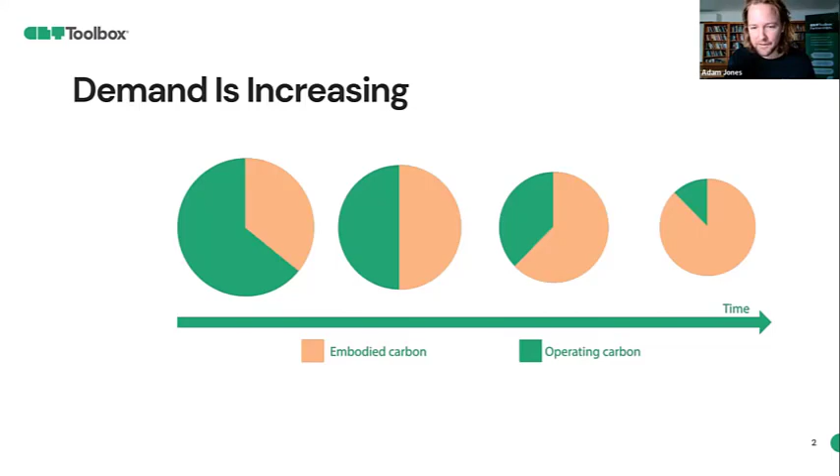So that's sustainability, and then also it's just a different product. Especially when it comes to exposed timber, there are proven benefits as a biophilic design element. There are different patterns about biophilic design according to Terrapin, and one of them is designing with natural elements — we're designed to be in natural materials, not in dog boxes with no inspiring nature around us. There's loads of research to back up the benefits of biophilic design: better productivity, employees taking fewer sick days, improved stress levels, and all these sorts of things.

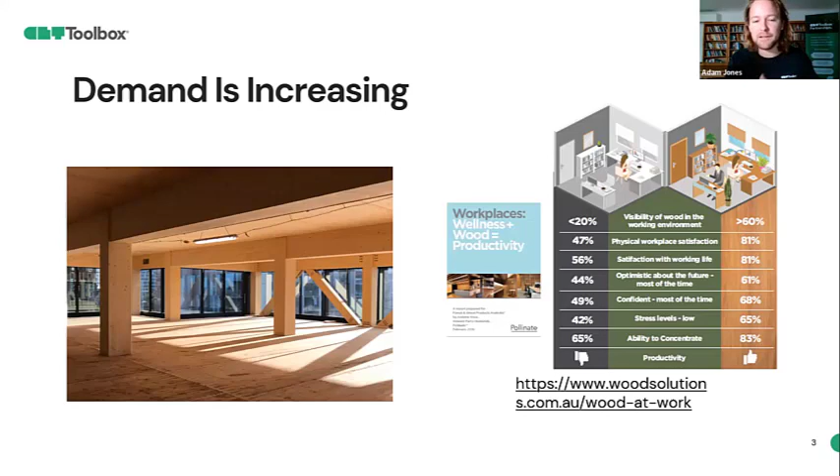So if you're the owner of one of these assets, you actually have a better ROI on the asset itself, and even if it does cost a little bit more, there is a payback period. The numbers vary, but a commonly used figure is about 5% as a reasonable estimate of what that improved rental yield might be.

But it doesn't matter how big the drivers are in terms of demand, there are bottlenecks to the adoption here, and that's one of the things we're trying to target in our medium to long-term roadmap, just to look at the bottlenecks more broadly.

So at the very beginning, you've got the client and architect, they're wanting a lot more timber for obvious reasons. In design meetings, I don't think there's too many saying no at that stage, because we're dealing with a better product, and from a triple bottom line point of view, something that can be better as well if designed properly.

But then if you have the architect who wants the building, they've got to find their project structural engineer. Around the country right now, part of the research we did, we've got say 10,000 to 11,000 structural engineers across Australia and New Zealand. Out of that, we've got about 1 in 300 who are true mass timber specialists.

Or timber specialists in the mid-rise context. That means if the architect just shoots for their usual engineer, it's almost certain that it's not going to be someone who could take the design forward. From my personal experience, if it's not one of the timber specialists, a lot of the time they might not put their hand up and say 'I don't want to do it because I don't know how.' A lot of the time there'll be other reasons put out instead of just not being able to do it, because no one wants to say that to a client.

But then you've got quantity surveyors as well. So say if it does get designed structurally and it goes to the quantity surveyor, if you've got a traditional quantity surveyor who may not want to put the time and effort into raising the benefits of timber - things like speed of construction is one. So if you build faster and you've got things that have a dollar per week cost, you reduce the weeks and you get a direct cost saving, that's significant.

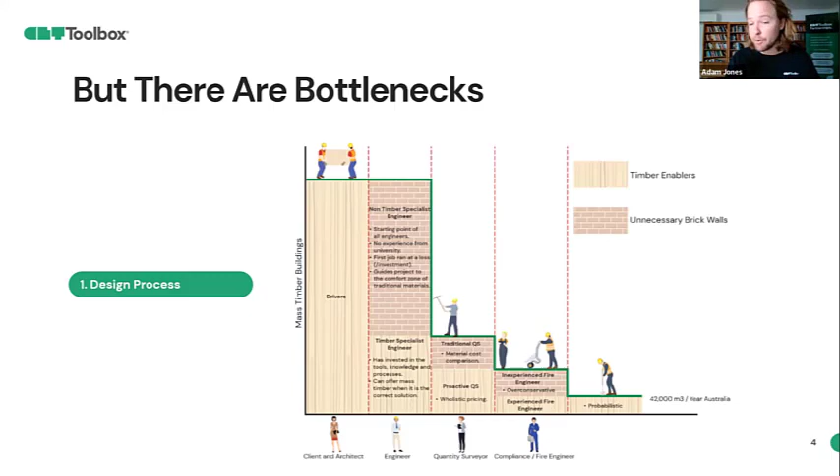We're less than a drop in the ocean compared to what concrete is. So one of our values as a company is to grow the pie as much as possible. We don't have to worry about cutting the pie at all, because we're cutting the pie on something that's just a tiny fraction of the overall market. If we solve collective problems, we can grow the pie significantly and improve things for everyone, and have a net positive contribution to sustainability.

So for us as a company, that's the overall arching bottlenecks. What we're trying to solve is one specific part of this bottleneck diagram I showed you before, and we're focusing mainly on the structural engineers, with secondary benefits on other things like compliance, which we can talk about later. But there are 2 major problems. Number one, it isn't taught at university, pretty much at all.

I think you get a 4-week timber course where you do a bit of class 1 low-rise construction, but nothing in that mid-rise context. So that means the structural engineer on the job has to try and figure it out themselves, and there's no Australian standards. So where do I start? What's the authority? These are really hard questions to answer.

You've got guides from FP Innovations in North America, which are absolutely phenomenal. proHolz has got guides, which are phenomenal. You've got Euro codes, local standards, New Zealand standards, WoodSolutions, and 50 guides. For someone starting their journey, it's a very hard task.

And then to know what the authority is and when to bring the right design method in for the right context as well. We've got different species in Australia, so where is it applicable? If you're using Euro codes, can you use that for the local context when it comes to design methods?

These are things every single engineer has to ponder at the start of their journey, and I'll talk about replication costs later. The second problem is the reinvention of the wheel, doing the same task. When there's no software solution, every engineer builds spreadsheets to fill the gaps, and everyone's building the exact same spreadsheets, whether it be WSP, ARUP, Aurecon, TTW. So there's reinvention of the wheel, which drives up overall costs.

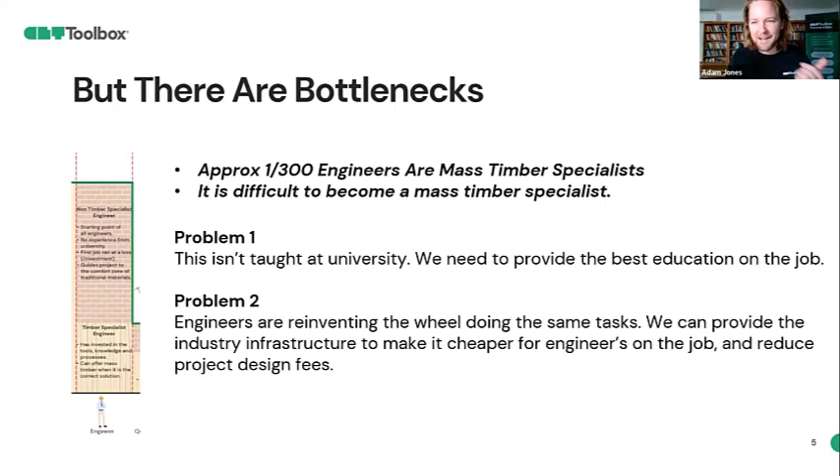It's not just for engineers, it's also for the supply chain. If you've got a design guide with span tables underpinned by a certain vibration method, for example, and you upgrade the vibration method, you've got to reproduce all your material for your design guides, and then somehow get that manually over to the engineers as well.

So as part of our research, we interviewed mass timber specialists around the country. We asked them how long it takes to build out a CLT floor design in the ambient case using Excel spreadsheets, and how long it took to learn reading all the design guides like I mentioned before. We did that for every single element in the timber design ecosystem, and for 3 types of buildings.

So you've got a post and beam building with CLT floors, GLT beams and columns, and we grouped up all the things you need to design there. We did the same thing for a hotel building with CLT walls and CLT floors, and then for a light frame building with light frame walls and CLT floors.

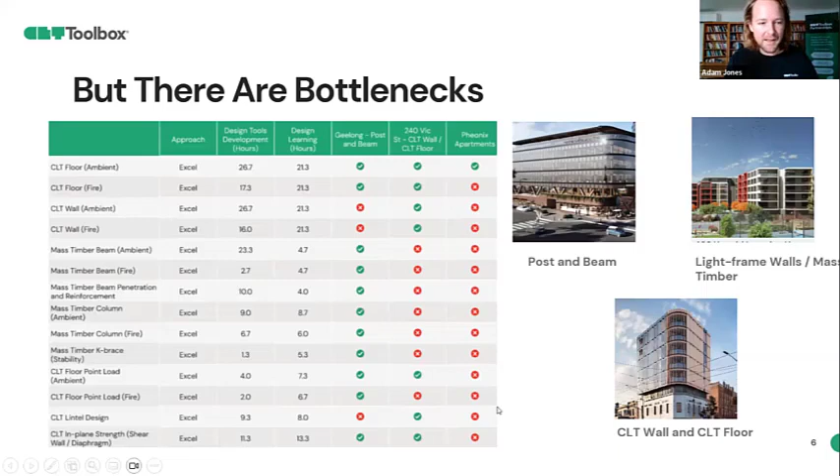That's not the full set of computations you can see there, but what it came down to is about 500 unpaid learning hours. So if you're doing this for the first time, without the education, with the need to build spreadsheets, starting your journey to get to the point where you can design this, it'll take you about 500 hours that isn't required for a concrete and steel building where there's existing infrastructure.

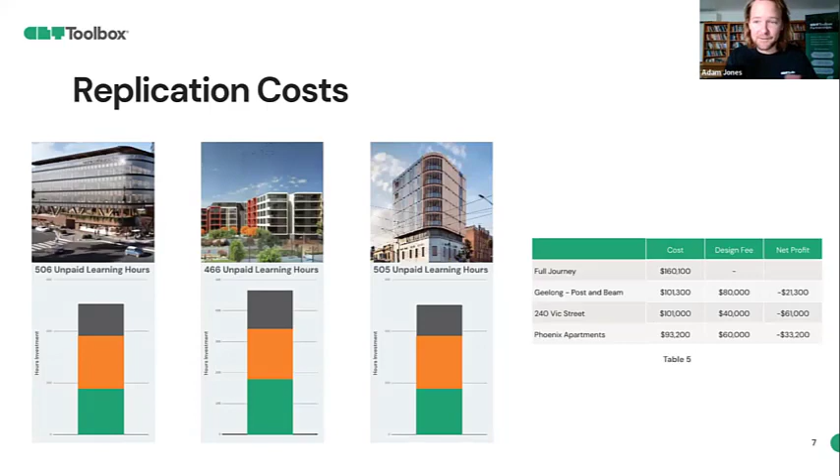So that means if you're putting a design fee in for one of these projects, if you're trying to be competitive with those who've already made this step, you essentially have to run it at a loss, because you're spending more money and time upfront figuring it out than the actual design fee allows for. That's essentially the bottleneck for engineers. As I said, there are 10,000 structural engineers around the country, and not many timber specialists. We're trying to give the tools to those 10,000 structural engineers, and I'll talk about that later.

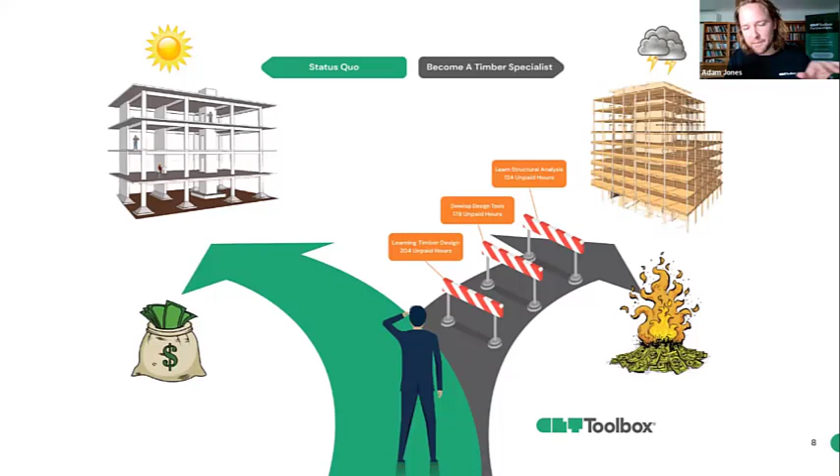So next I want to talk about this idea of replication costs. Every engineer around the country has to solve these hurdles themselves, and every time an engineer solves these hurdles, it increases the relative cost of the timber design compared to a concrete design. And that's replicated all the time.

There's ways we can reduce this replication cost using inspiration from other areas. Think about writing books - you've got J.K. Rowling. When she did Harry Potter, she wrote the book once and solved that problem once, then used distribution channels to print it a billion times. She didn't have to print it for every individual reader.

When it comes to ballet, which my partner's in, it's a similar thing - you do the choreography once, you teach it, and then you dance it as many times as possible. And also in the automotive industry, it's something where you design it once and use it many times.

This concept is a bit foreign in construction. We don't solve the problem once and use the concept of leverage. A lot of the time, everyone's going to solve the problem individually - every engineer at every company. So this is where we draw inspiration, because the ultimate solution to solve problems once and use leverage is software.

Right now, let's say someone's starting their journey - they're a 1 out of 10, of course they're going to be, they're just starting. They need to go through that river and the hurdles and get the scars and pain on their journey to become a timber specialist.

But through software and this idea of infrastructure, we can get the very best people around the region - 8 out of 10, 9 out of 10, 10 out of 10 in what they do - to solve the problem once. They might be the PhDs in the specific topic, the best authority. Leverage their brain, turn it into infrastructure, and that means the person just starting out isn't starting at level one - they're using leverage to get the very best the whole industry has to offer.

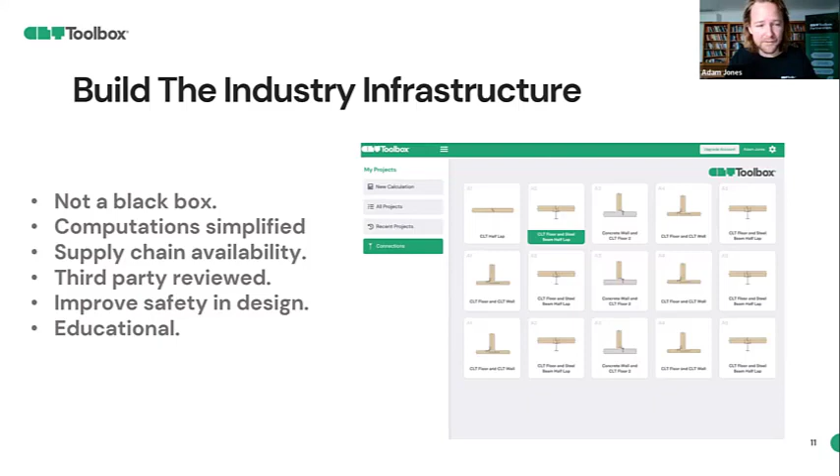And most importantly, is educational - because some things are quite complicated.

As a primer, something like floor fire design, there's a bit of a grey zone between what the structural engineer does and what the fire engineer does. Some suppliers have fire design guides now, and there's a DTS solution - deemed to satisfy - for structural adequacy, integrity, and insulation. But it's only for simply supported and two-span equal cases. It's not going to cover the range of cases.

So there are times where you might need to step into performance-based design. Then you've got effective stiffnesses - there's different methods around the world. It's a shear analogy I used to use, and it took me a while to realize you can't use it for non-symmetrical sections, which is the case for fire design or designs where you've got different grades throughout the layup.

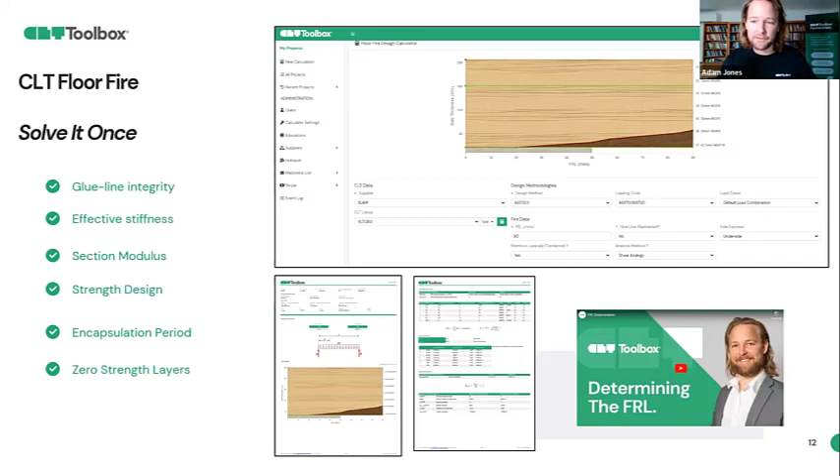Strength design, encapsulation, and zero strength layers - again, something treated differently around the world, whether you're in AS 1720 most recently, but also in the upcoming Eurocode 5, it's treated differently too.

Or CLT floor ambient design - a lot of design guides out there by suppliers have totally robust design methods underpinning the span tables, but a lot of them will use a different vibration method to create the span table. That means if you're using it for a prelim design and then put that in for pricing, it might not be an apples-with-apples comparison if they're using a different vibration method.

And also DFMA education - if we are going to drive down the cost of mass timber more generally, we need to actually understand the implications. If you change your grid spacing by half a metre or something, little do you know as a designer, you might be the difference between a full truck and no wastage in terms of transport, and maximizing crane liftage and speed versus reducing that by 50%. Little tweaks like that make a big deal, and getting that data from DFMA through to the hands of designers matters.

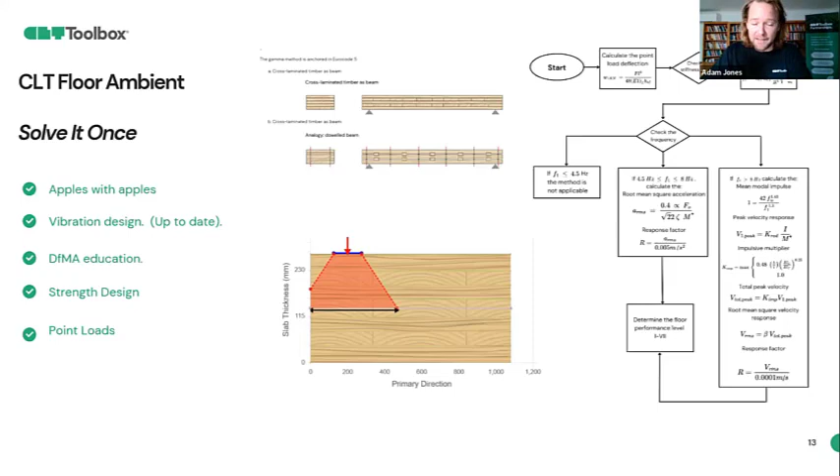And then point loads as well - that's actually quite a complicated thing to do, and to ask engineers to solve all that is a big ask.

So part of our plays, we're doing partnerships, firstly with the supply chain. We're in contract phase with a lot of the mass timber supply chain right now, and that means getting the one-stop shop, because if we're trying to grow the pie and make it as easy for engineers, we are in that grow-the-pie attitude - going from 0.x% market share and growing it by a significant proportion - then everyone wins.

Also associations and universities - especially when it comes to unis, they are the most progressive people on the planet, caring about sustainability in that cohort and demographic, but all they're really offered is concrete and steel. I'm aware students really want to be proactive, and if they knew what their career impact was with their decisions, and learned how to design with timber, comparing it to their individual decisions, it's chalk and cheese - because by far the highest leverage you've got is in your career, and at least knowing how to design timber when the right time is.

So yeah, we're looking to partner with universities as well. It's not our immediate priority, but we're going to try and target fourth-year electives, because those are points where we don't have to rely on curriculum changing, and engineers can proactively choose what they want for their final year project.

And then also investors - we've closed part one of a seed round, and we've got a really good group of investors on board, including a co-founder of Aconex, Rob Phillpot, who's from Gravel Road, also some other executives with investment banking backgrounds. Interestingly, BlueScope X have joined our journey as well - they've got their legacy business, but also their decarbonisation arm. And then Archangel is our lead investor, and we're about to finalise another round this week. So that's where we are right now.

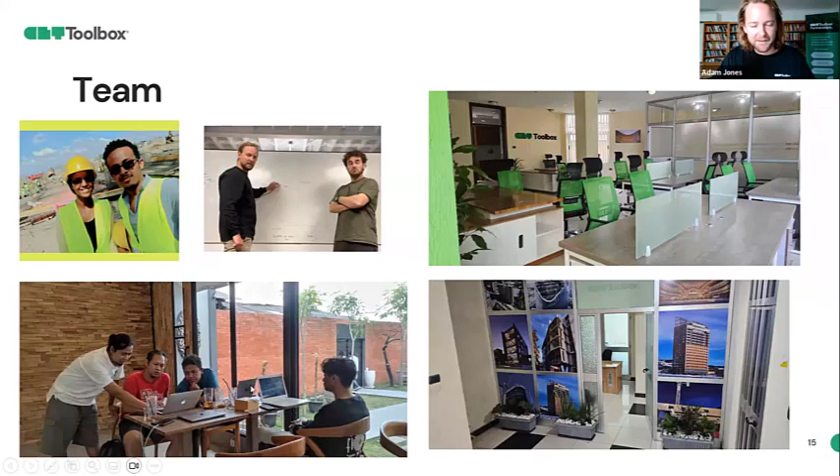And then also we've got a software team in Semarang, Indonesia, on the bottom left here - totally different culture from a software point of view as well. So we're just starting our journey, and we're about to release our first release. We've got a bunch of users on the software right now, and we're looking to have light frame connections and hybrid as well. The idea is we solve the problem once and then use it as leverage to make it as easy as possible to drive change in timber construction.

So with that introduction, I might get into the software now. It's 11:26, so I've got one eye on the time. All right, so it is a web-based software.

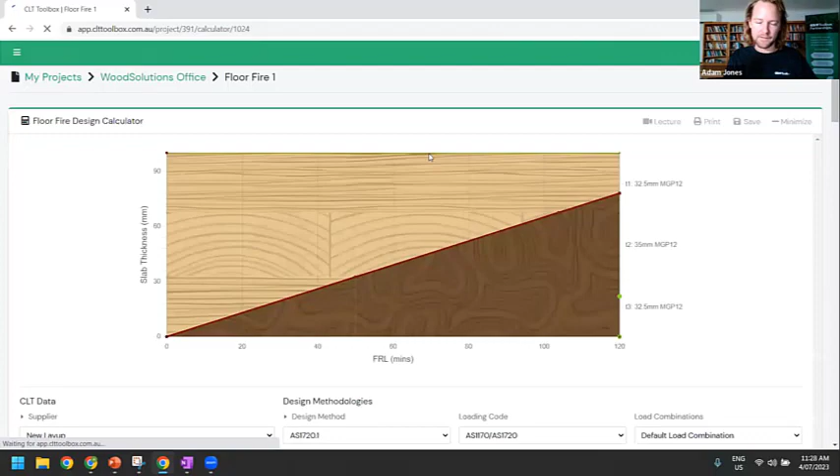All right, so I'll speak about it as if I'm an engineer. Let's create a new project - or you can calculate a project under an existing project. So let's go WoodSolutions Office, Floor, Fire 1. And I'll start on fire design just because I showed it before, and it's one of those things that's a tricky problem out there. It takes a long time to actually learn this.

So I mentioned before, our most important value as software providers is not to be a black box. So we use visual images all the time here to visually show what the software is trying to do. It serves a lot of purposes, but we have a serious review process, so there are no software errors. But if there ever was one, since it's not a black box, it'll stand out like anything - it'll quickly be weeded out of the platform in a 2-week release cycle.

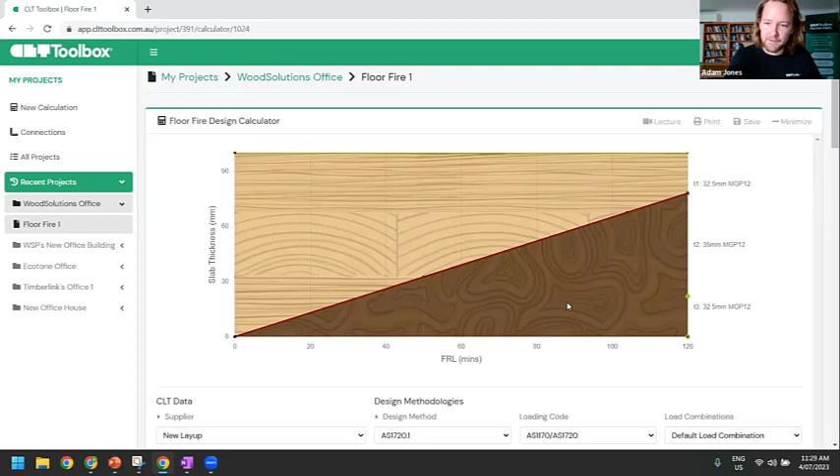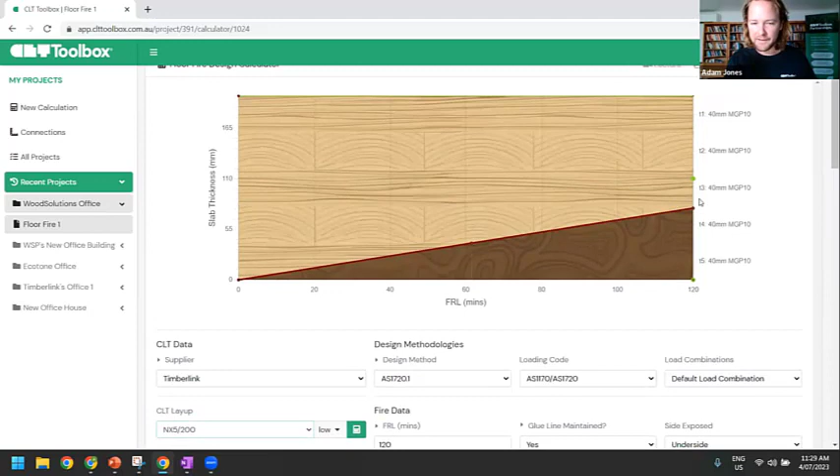So you've got here the FRL on the x-axis, you've got the grades on the y, and the slab thickness. You've got the ability to do new layups, individual layups where you can just set your grades and build it from scratch - probably don't recommend that, probably recommend actually using what's available by the supply chain. So you can see here you've got the different options from suppliers with all their supply chains ready to go. So you can see here I just chose a Timberlink panel - you've got MGP 10s on the outers.

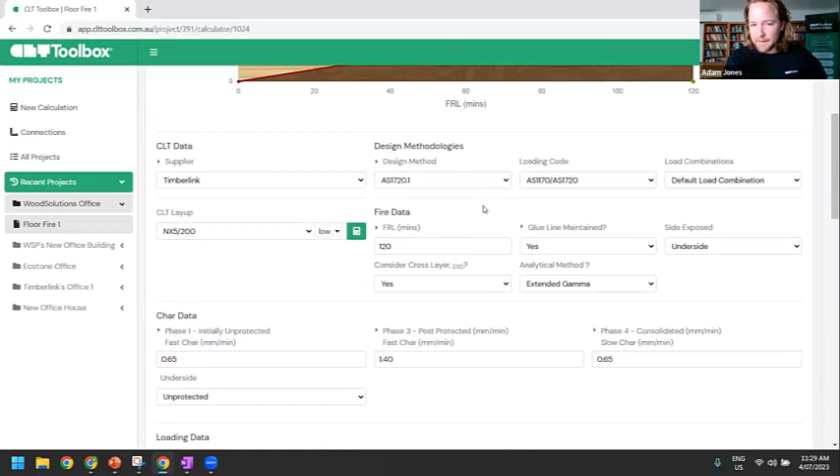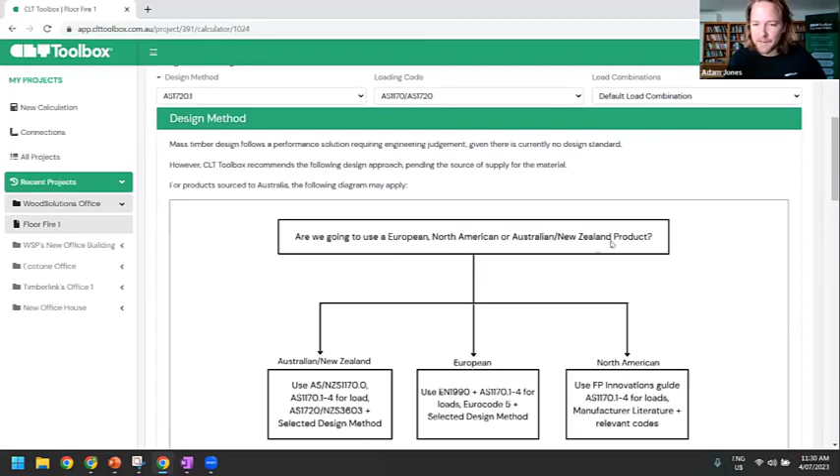Going through here, you've got different design methods. We've built in the local loading standard, local design standard AS1720, and Eurocode 5. So it's the ability to swap between suppliers and design methods as well, to make things as easy as possible, and also with the loading code as well. Not being a black box, whenever you're uncertain about something, that's where we have a drop down, and this is where we provide the education. So you can go, 'hey, what design method do I use?' We have a bit of information here, a bit of a question flow diagram based on where you're actually designing and getting the material from.

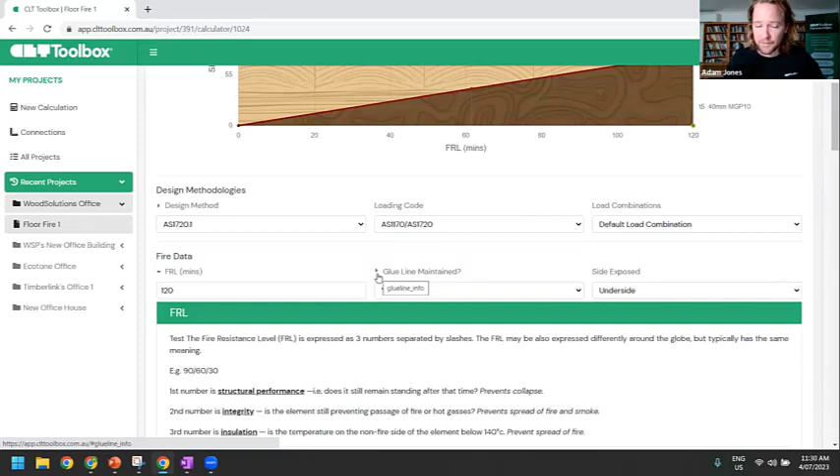Moving through, when it comes to FRL, you've got the data, and with some building surveyors on the call right now, this has got a big opportunity to actually educate structural engineers on the compliance pathway. We're always open to speaking to building surveyors as well and getting the right context in the drop-downs and agreeing upon things. But for any case, we've got information on integrity, performance, insulation, and a bit of information about fire tests.

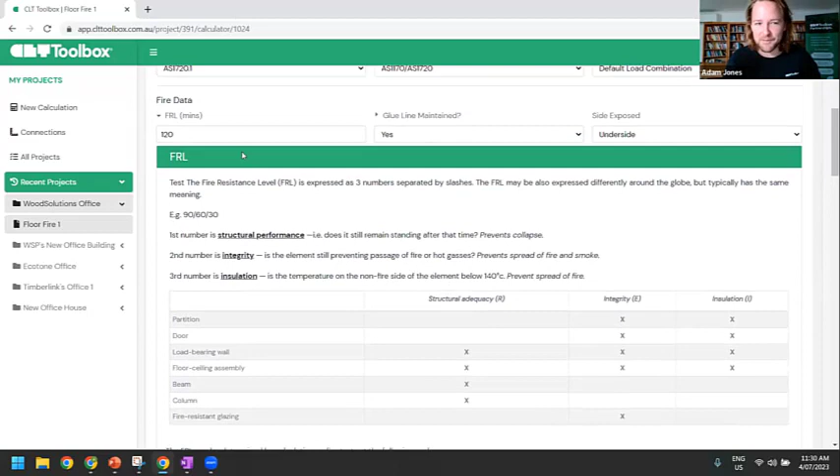And this is a second release, so I think on the FRL and compliance side we can really build this out, and most importantly have videos and education. In this video, it's just a conversation I had probably ten times on different projects about what the compliance pathway is, do I need fire tests, why would I, why don't I, all these sorts of things.

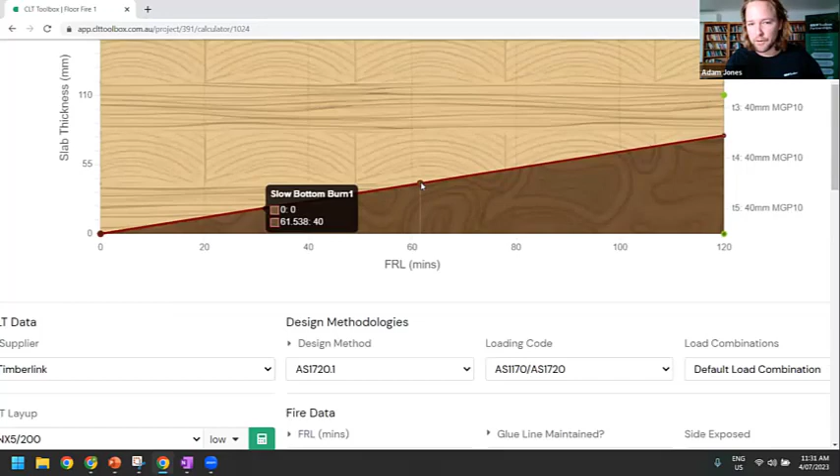We've got the ability for glue line maintenance, so if the glue line, for example, was to delaminate or the glue was to fail before the fire line reached the glue line, then you've got a different scenario there, and we've got that built in. You can see the faster char model built in around the glue line for the first 25 millimeters before it gets insulated and reduces as well.

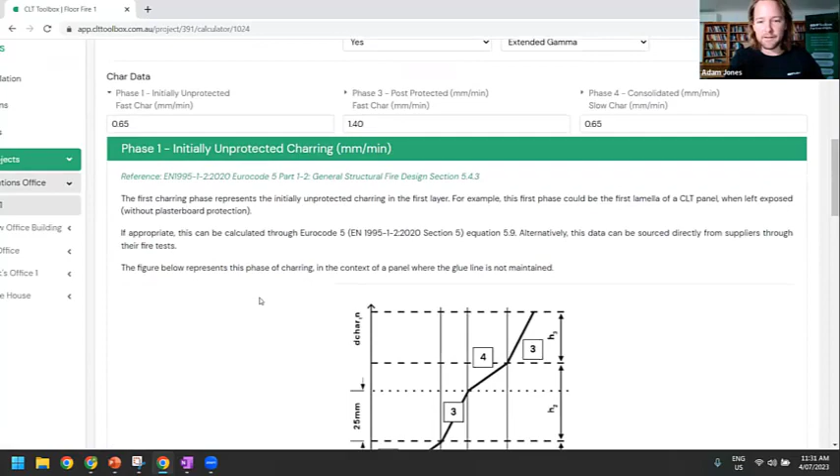Then following that, you've got your different char rates. This can usually be done directly from the supply chain, and if the supply chain wanted to, we can hard code it in for the individual suppliers as well.

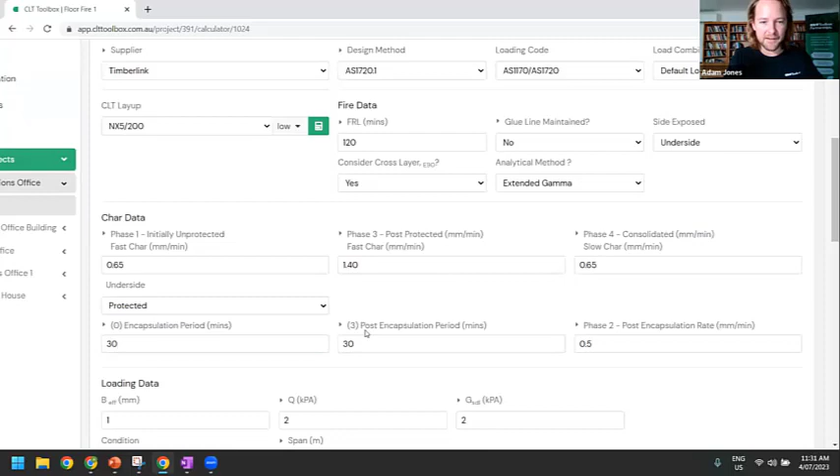You've got the ability for plasterboard protection, so I just added protection in. You can see here the plasterboard adds in, say, for the first whatever the encapsulation period minutes is, and that's the period where you've got no charring. Then after that, you've got the temperature reaching above 300 degrees here, so there is charring, plasterboard falls off, and you've got the faster char rate up to 25 millimeters, and then that's the end of the first lamella.

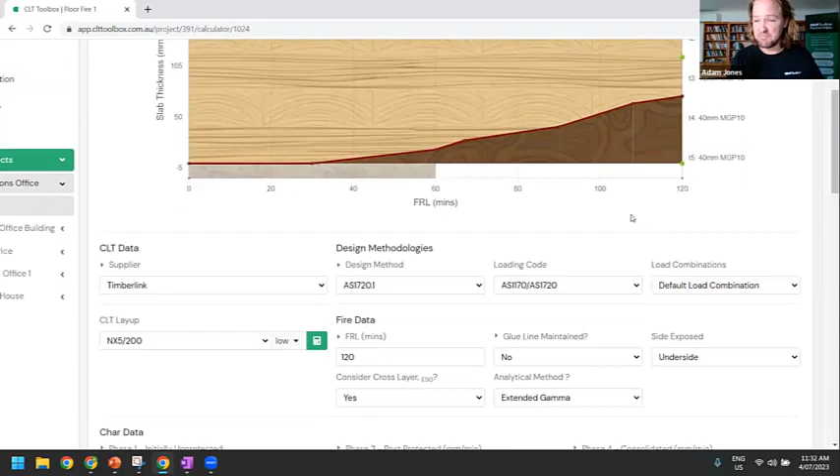So, what is the char rate of CLT? You can see right here, there's not one answer. It varies a lot based on basically the building physics or the physics of the fire itself, and it also varies upon the input of your glue line.

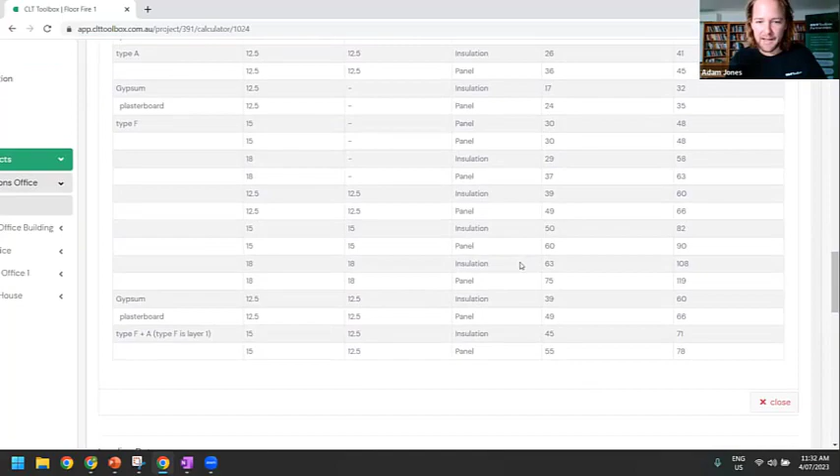Moving through, if you're not sure what that means, we have the information on the char rates, what it is, and right here we've got information from the Fire Safe Use of Wood in Buildings, the Global Fire Design Guide, with some of the data commonly used in start of charring and failure time. But again, being a performance-based software, which I can talk about more later if we want, that means it's on the engineer to do it, so you can use the data directly from suppliers, which is most robust in that sense.

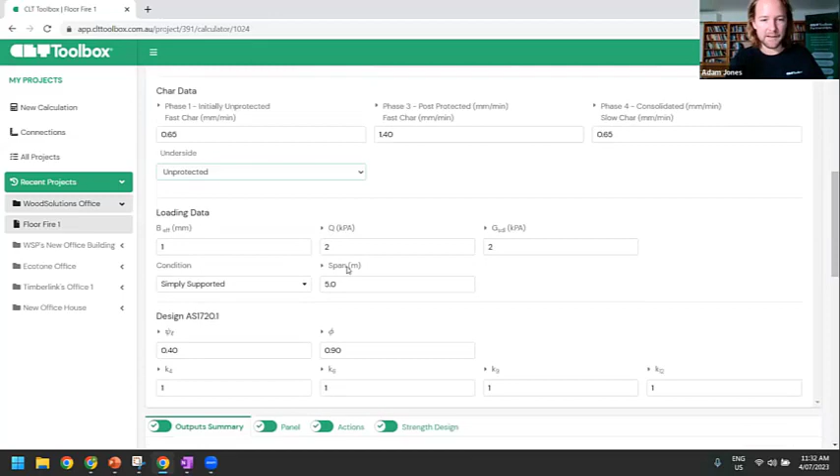All right, moving through, it's got encapsulated, we're building out all the analytical methods. One of the limitations of spreadsheets is you can't really build out robust and quite complex analytical methods. When it comes to span tables, you don't have two-span unequal either, so even if we do have some guides, it's not available for the two-span.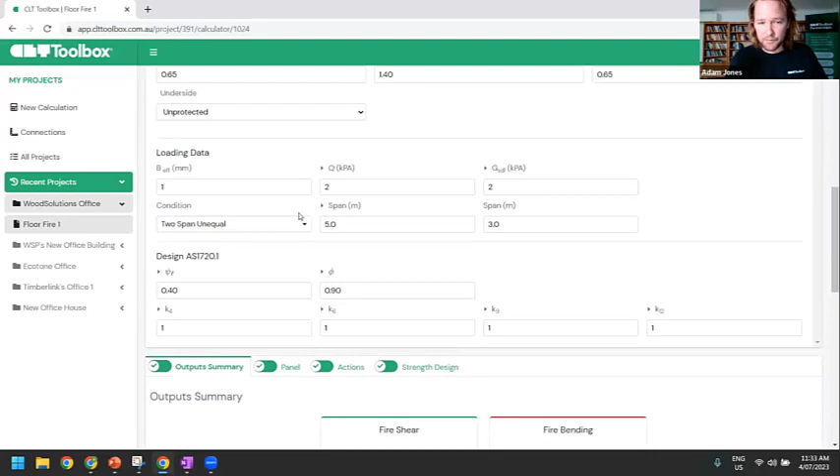So moving through there, again, DFMA education. We've got a bit of information on transport limitations here, helping the education from a DFMA point of view, what's the impact of spans, and then moving through. You can see here your design where we're failing here, so I'll just choose a bigger panel, and later we can upgrade that, and it's all dynamic based on what the inputs are as well.

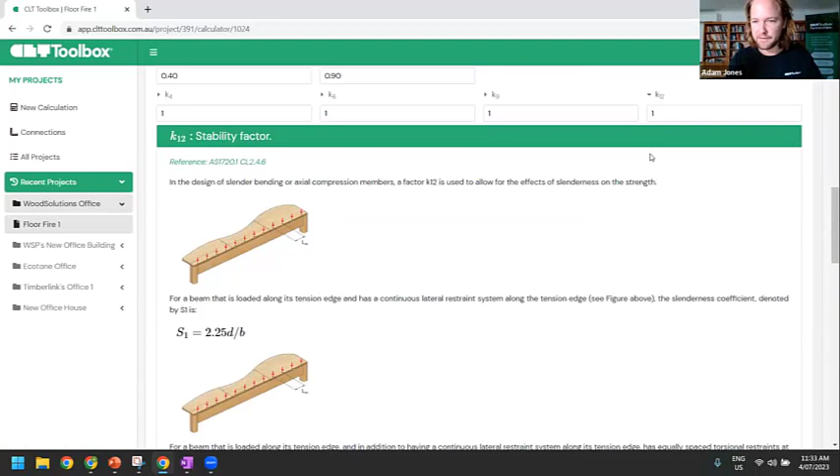All right, so then we've got the design data from AS1720. We've recreated the imagery and things like that for the mass timber context as well, so you can educate yourself and have it at your fingertips. Right now you can see there's the NCC, there's a proHolz guide, there's Eurocode 5, a lot of different guides that engineers would have to download and source, and we're trying to get the education in one place to make things easy.

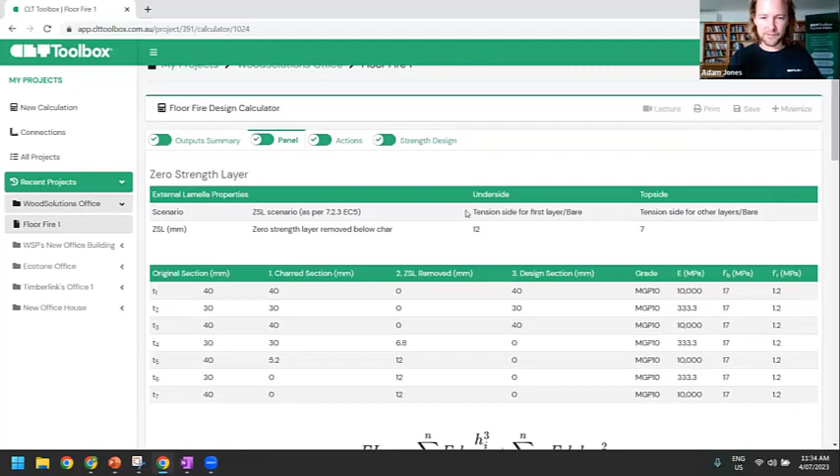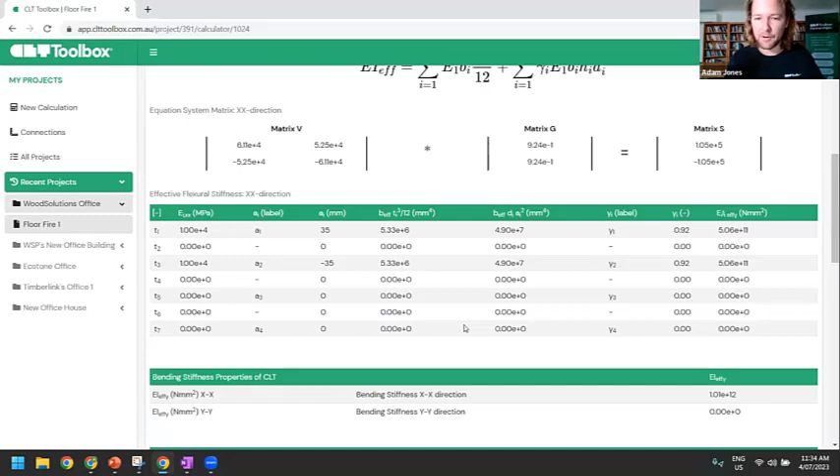So as a user, you can start going through the computations. You might minimize the input page and start going through the calcs. It's all dynamic, so right here we're using an effective stiffness method using the extended gamma method. To solve this, we had to solve 11 by 11 matrices, which again is really hard through Excel, or can't really be done in Excel like you might want to, and through JavaScript you can solve unique problems that can't be solved otherwise.

So that's a complex thing. We had to do the extended gamma method because things like the shear analogy method we've got here as an option can't be used for non-symmetrical sections as well, so there are times when the extended gamma method is the most powerful.

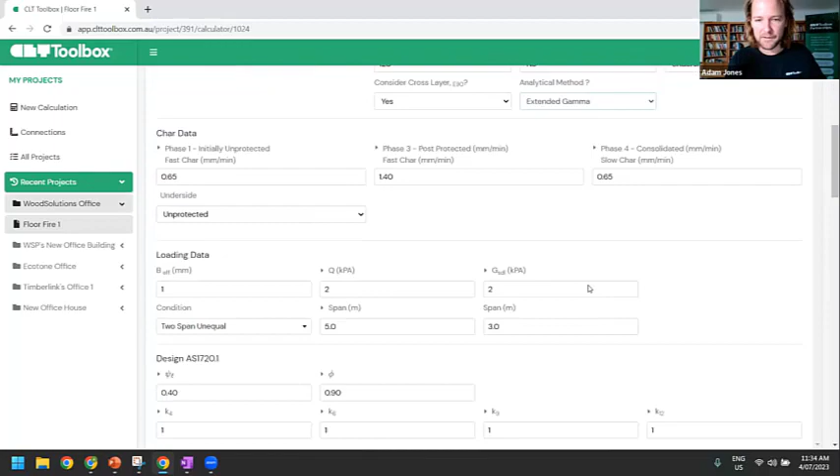Moving through, we've got the shear force and bending moment diagrams, strength design - not being a black box. We've got all the references for all the sources, as you can see here. Then as a user, make sure the design's good, and then you can print.

Right now, being early on our journey again, we've got the lecture infrastructure being built out. That's not ready yet, but our intention is to have lectures built in and have a proper timber design and education module that can be leveraged by universities as well, because I think any student can pick up something as easy as this and actually design confidently in a full project.

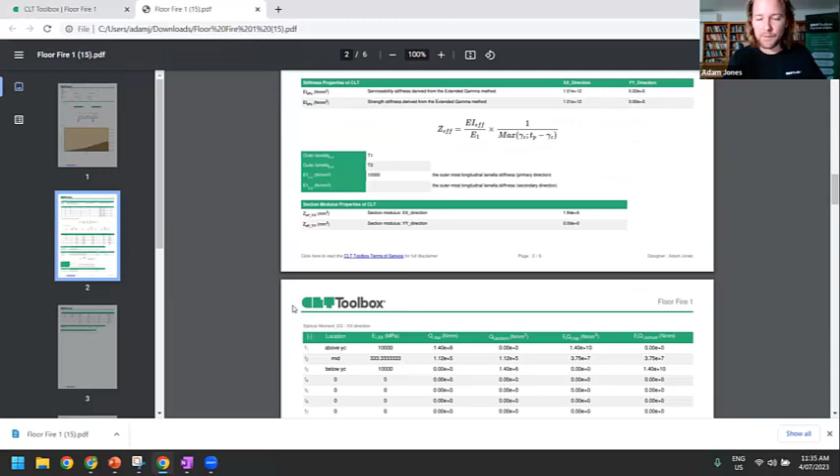As I said before, not just mass timber - we are doing light frame and the wider context as well. So design reports, of course, is what's required on every project out there for certification.

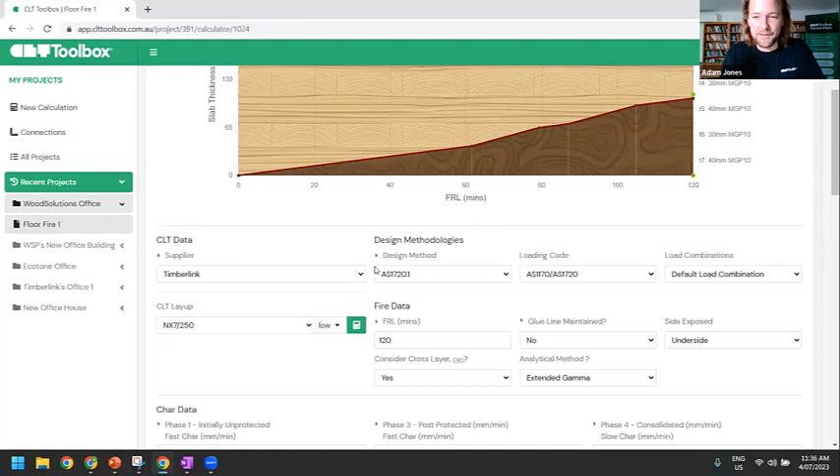One of the other problems right now, on that topic of certification, is if you get a mass timber specialist in the mid-rise context, they're using Dlubal RFEM and quite advanced software - not simplified software that's really easy to follow. Sending it to the third-party engineer for certification, they're like, what do I do with this? They haven't used Dlubal RFEM before, but through this we can actually provide an easy tool for building certifiers as well.

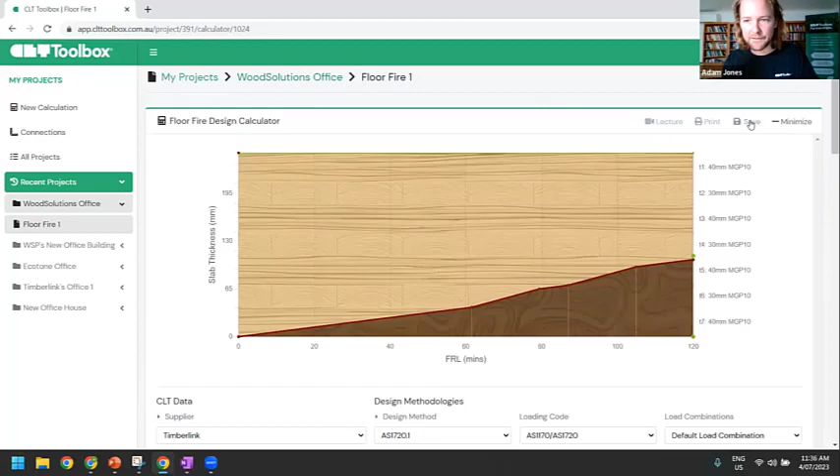All right, so once we're done there, we can hit save. Moving on to another calculator, I'll use the floor ambient design. Well, before I go there, I'll just show you the project level page - you can see we've got discussion features.

You can tag your colleagues if you've been in a meeting and there's a few things to do. You can have a discussion, invite your colleagues as well - so pending invitation - and then assign each of the tasks. So if you've got your senior engineer working on it and you're a grad or something like that, you can divvy up who's responsible for what.

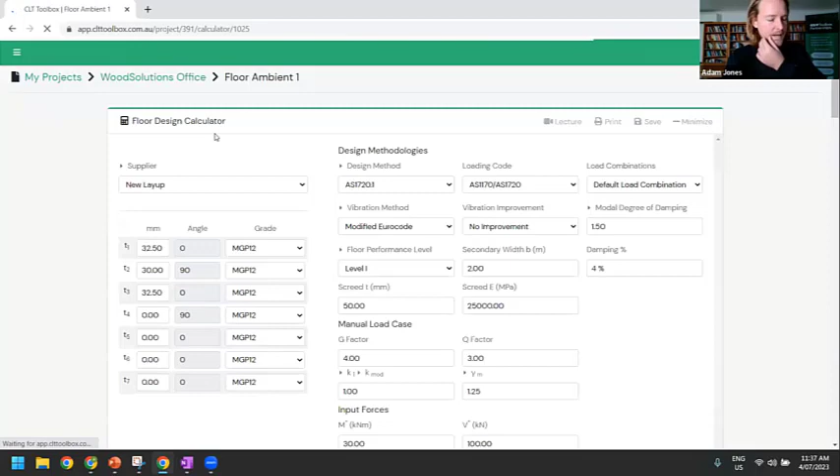So moving through here again, we've got floor ambient design, floor ambient one. You can go from this view as well. Later we might combine fire and ambient design in one, but there's a lot going on in each, so we've kept them separate at this stage.

But a few users have asked for it to come back into one, because it's one of those things you want to keep as simple as possible and easy to follow, and it is in its current format. All right, so again, we've got design methods.

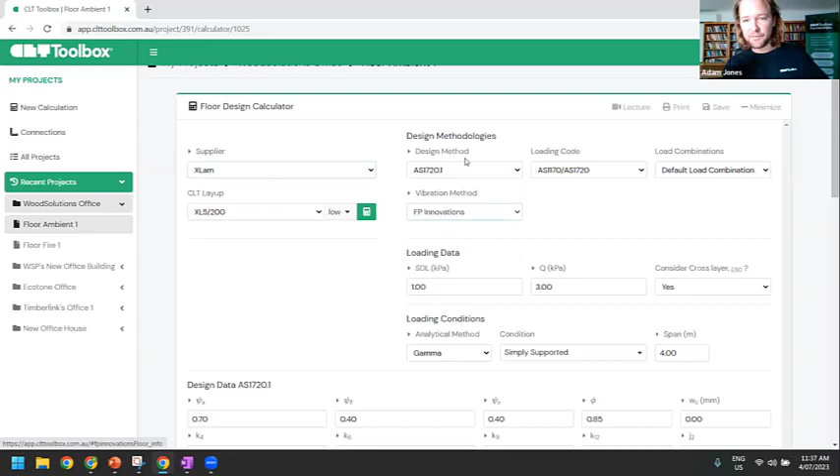So let's go, say, XLAM in this case. You've got different design methods, so FP Innovations being one, for example, for vibration, and this is again where we've got the drop down. So there might be some cases where this makes sense.

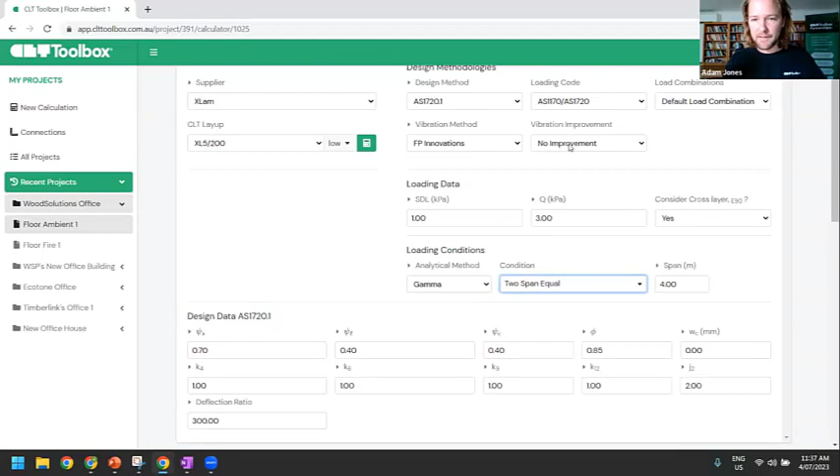FP Innovations is the only vibration method where you can get a benefit for continuous floor spans up to 10 to 20%. So let's say if we were going to do a 2-span equal, then you've got a dynamic - you got the option of the improvement here, as is the case in that method.

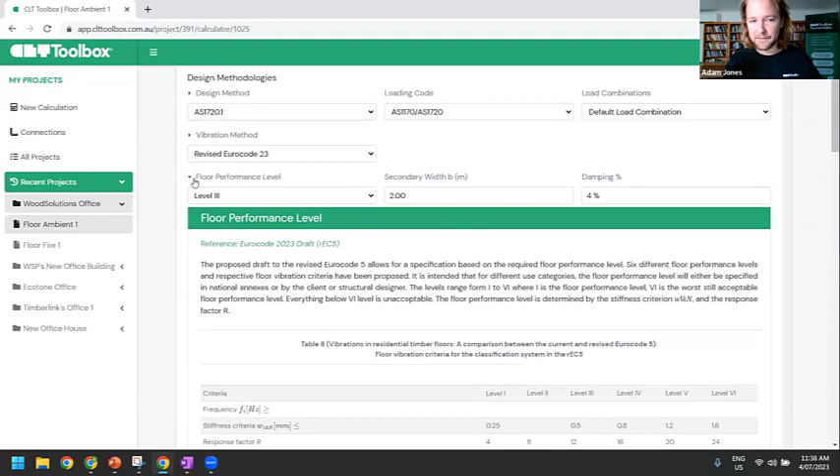Or there's the other vibration method - the upcoming Eurocode, now 2023, as a different method. This is the only vibration method which lets you specify a floor performance level and a response factor, which varies based on the building type you've done. So this is the only simplified method that does it.

You know, us being a simplified software solution, there are other software solutions which are more about your FEA modeling and things like that - hardcore analysis. Dlubal RFEM, I think that was one of the questions for what other software - Dlubal RFEM is another one out there which is good from an analysis point of view, but not your simplified method.

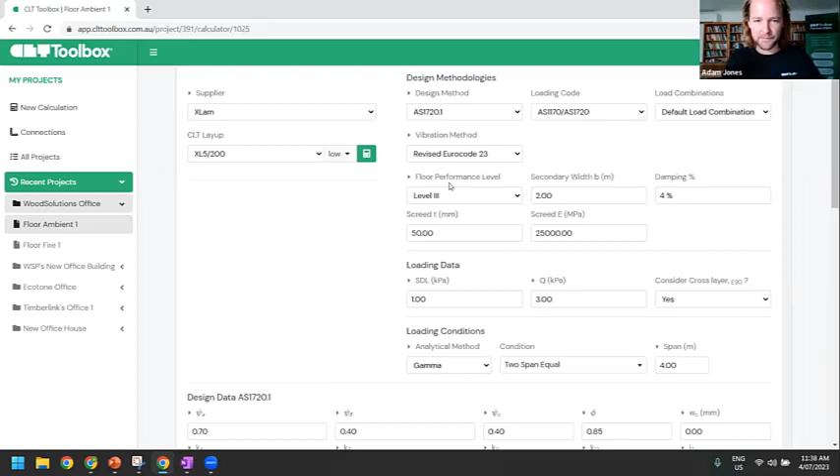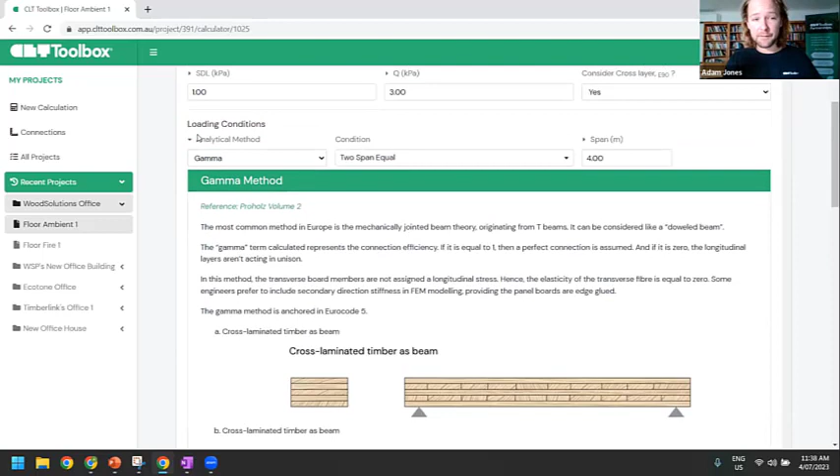But anyway, moving through, we've got FP Innovations, got your loading data, analytical methods, education on what the methods are - again different ones around the world. I like the extended gamma method.

Choosing your loading conditions - we're going to constantly be building out this analytical cases and actually do it from scratch. Again, moving through, you can input all the calculations as we go here, and then use a solver as well.

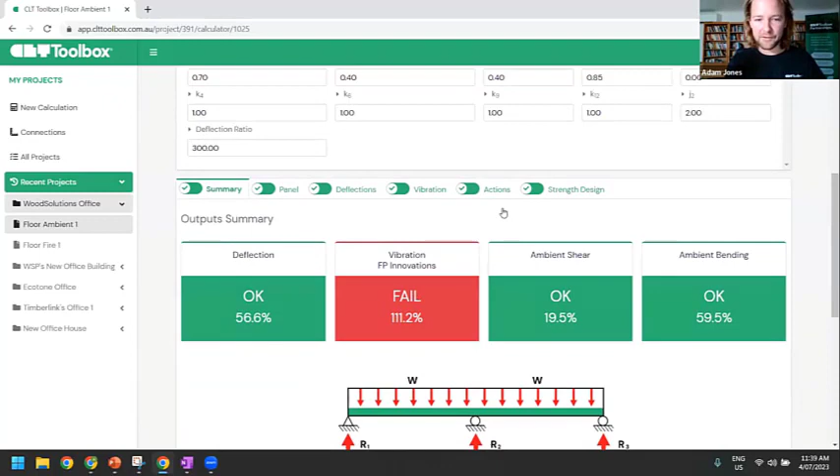So right now, you could just toggle through the whole supplier panel range and run through it, or we can just hit solve and it'll go through what the most efficient layup is for the supplier based on the vibration method chosen. If you wanted to, you can fix all these inputs and then change suppliers, so you've got an apples with apples comparison, because for the client it might be best to keep all your options open.

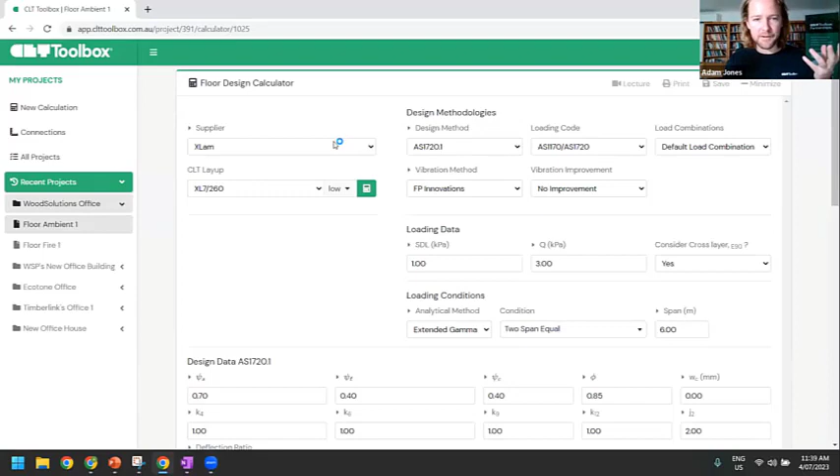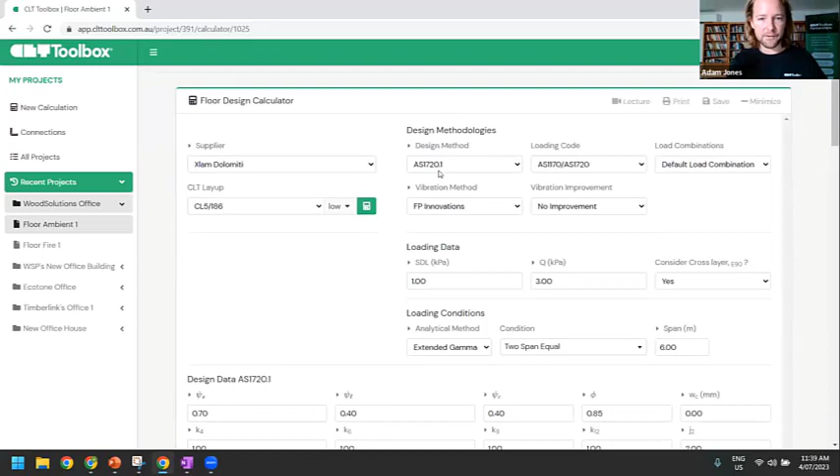If you were to use an overseas supplier, for example, you might change your design methods to Eurocode 5, keep your vibration methods, and as you can see here, it's all dynamic. So you've got AS1720 design data and AS1720 design methods, but if you change it to Eurocode 5, the design data updates.

Eurocode is actually quite hard to follow, but we've got it in a way that makes it a bit easier, so you can easily change your different methods. In any case, vibration is governing, so it's not going to be the design method in this case, it's going to be your vibration method that governs.

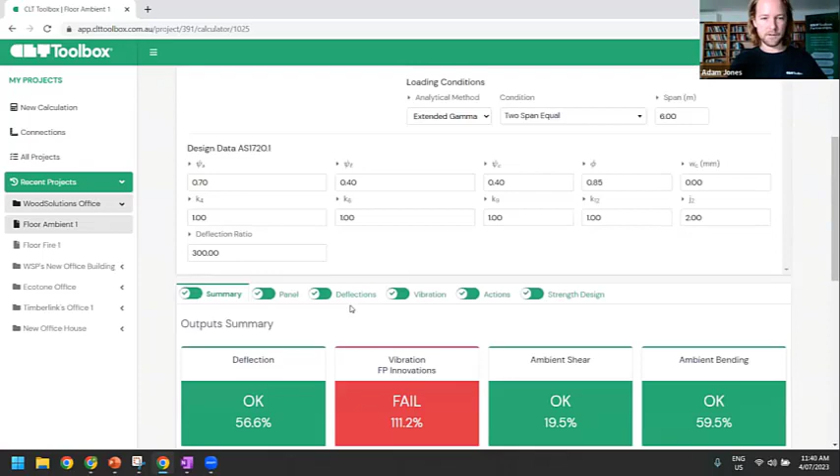So let's go back to that. I think we had a 200 panel working. I think it was, well, we're doing a continuous floor span, so I'll go 10% improvement based on the vibration method chosen. We can get a 220 working in that sense.

So moving on, usually I just choose one supplier and fix the panel, but because we can't favor any suppliers on a webinar like this, I just chose Timberlink and XLam for two different ones, who are all phenomenal. So 1140 now, I'll keep building out just a couple more calculations.

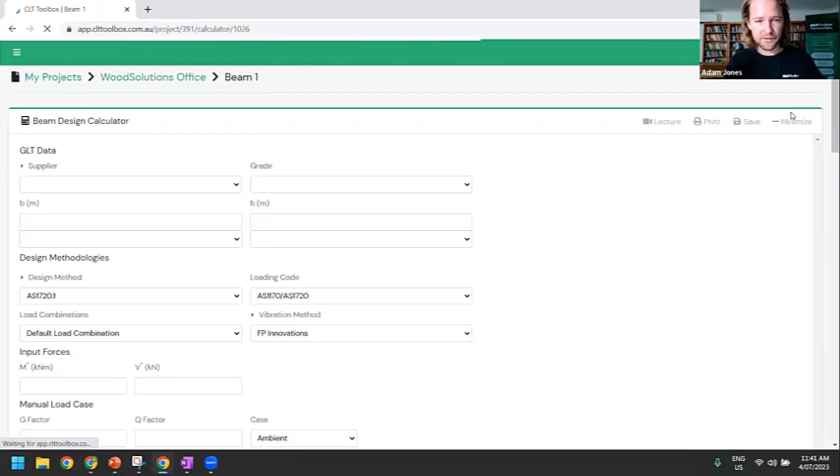So it's got beam design, so GLT beam. Our intention is to have LVL in here as well as an option, even though it says it's all about GLT. And this is where you've got the options here.

So ASH, Australian Sustainable Hardwoods, are in here. Whenever you've got a supplier, you've also got the drop down of the description of the contact who it is. So Nathan Benbow in this case, and it's got a bit of a spiel.

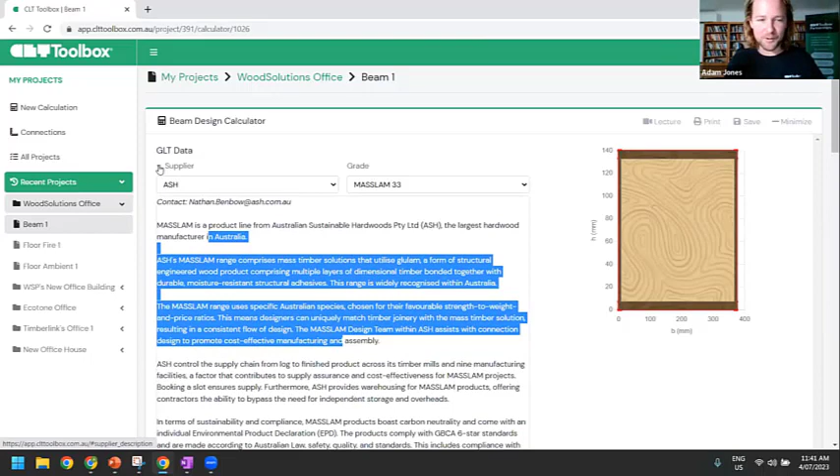I got Daniel Wright's initial spiel, but then changed it a little bit for our context. Daniel's been awesome to work with as a partner through this.

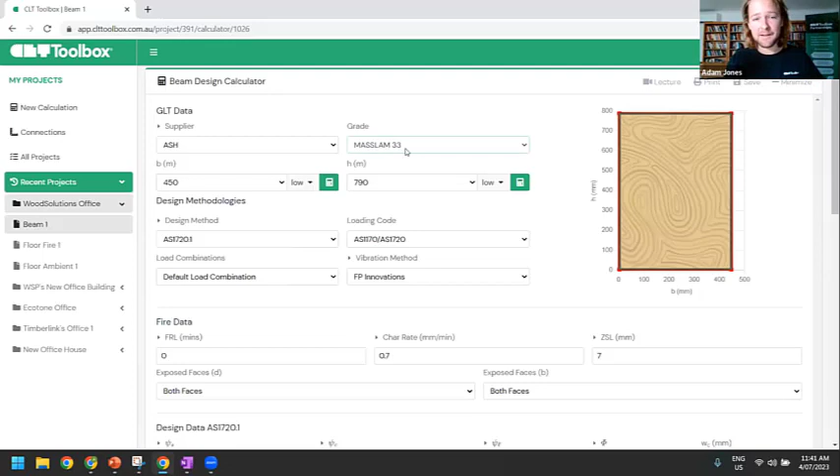So you've got these are the sizes of what Ash can supply right now, so you've got full confidence of the availability. Also in terms of their grades, if for whatever reason Ash needed to make a change, they could just give us a call, we could change it immediately, and then the grades will automatically update in the software as well.

So again, moving through, you've got different load combinations. You've got the ability to do manual load combinations with your own K1 inputs for ambient or fire, or you can input forces, meaning you can use Microstran or SpaceGass or a different analysis software and use it with it.

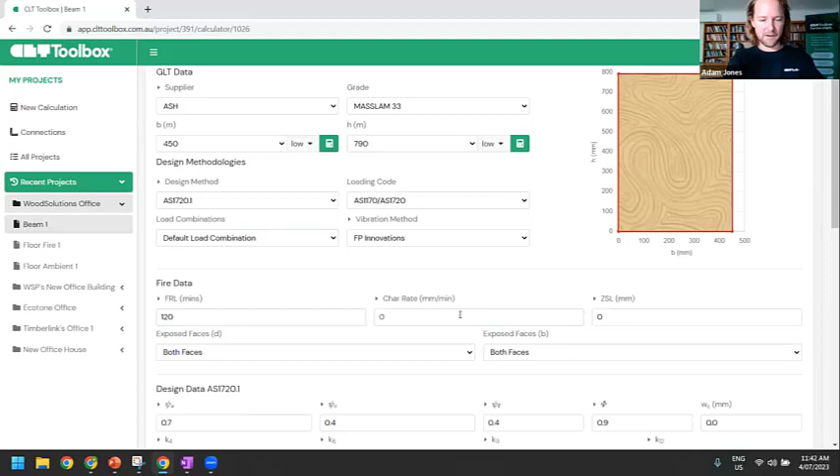So moving through, I think we had to say the FRL is 120, char rate. You'd have to speak to the supplier about what the char rate is, but it's 0.7, let's say. I know Ash has got better performance at 0.7, but let's just use that for the sake of it. And then a zero strength layer as well.

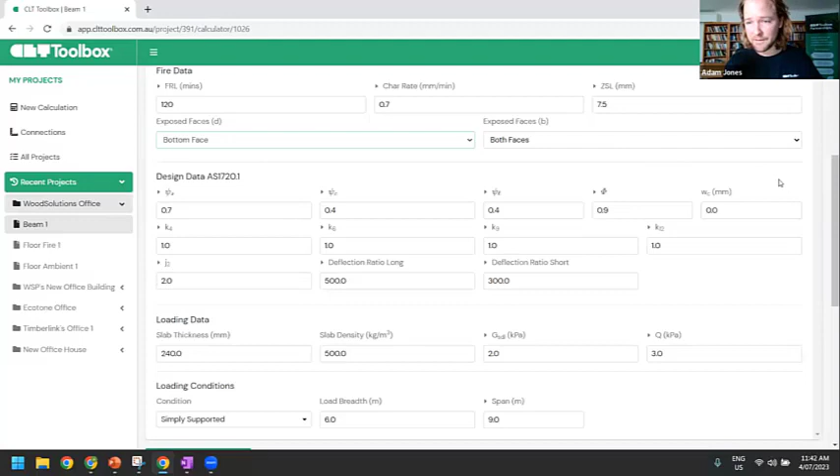In terms of exposed faces, we've just got the three-sided fire exposure here, deflection ratio long, short. Your J2, some suppliers will be less than 2, but two's an input there. And if you're unsure about what any of this is, being a grad you might be educating yourself—again, we've got the resources, the references, so someone can really expedite their journey to become a timber specialist.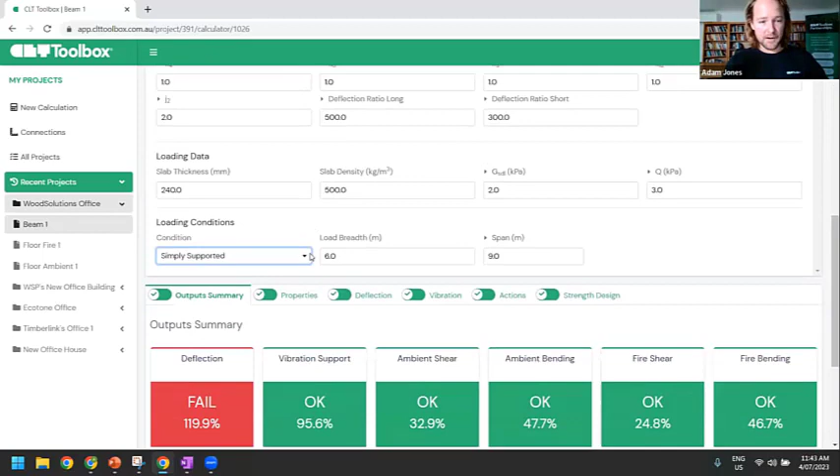So moving through, again you've got the different cases. Let's say it's a 9 by 6 meter grid. You can hit—we're currently failing for deflection—you can hit solve on D, and all of a sudden we've got a 450 by 920 beam working.

Or if you wanted to, for example, fix your floor to floors and solve for your beam, you can do it that way. We've got a 250 by 1100. So it's a quicker way of doing it, basically scrolling through what the supply chain's got. And then, moving through, we've got all the design methods here.

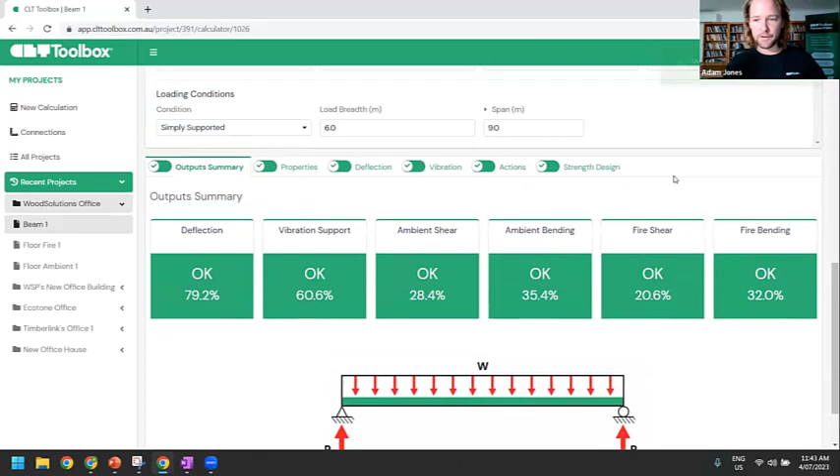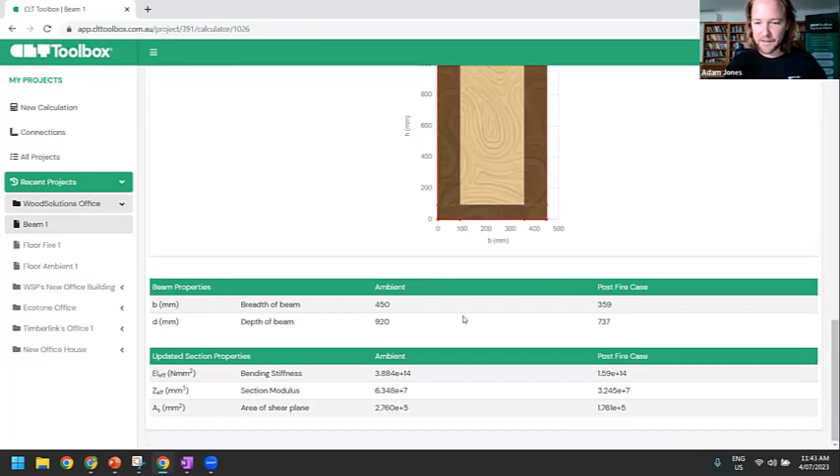We are modular, so for example, you might not need vibration for the design of a roof, so you can turn that off and vibration's gone. For robustness, you might not need vibration or deflection, so you can turn that off as well. You can just turn whatever off you need. Sometimes you might just want your properties and section modulus to take elsewhere, and that's when you turn everything off. So putting everything back on for the sake of it.

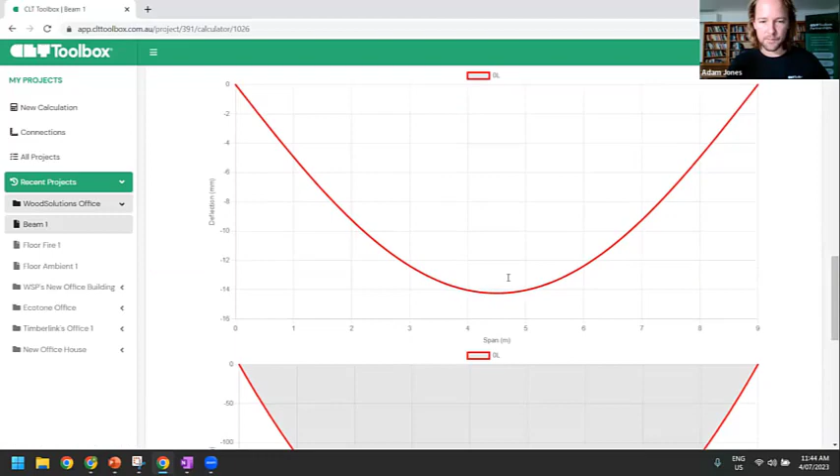Got that option there. So what I'm going to do is hit save. It's 1144, so I might do a really quick point load calculator after this, and then take it from there.

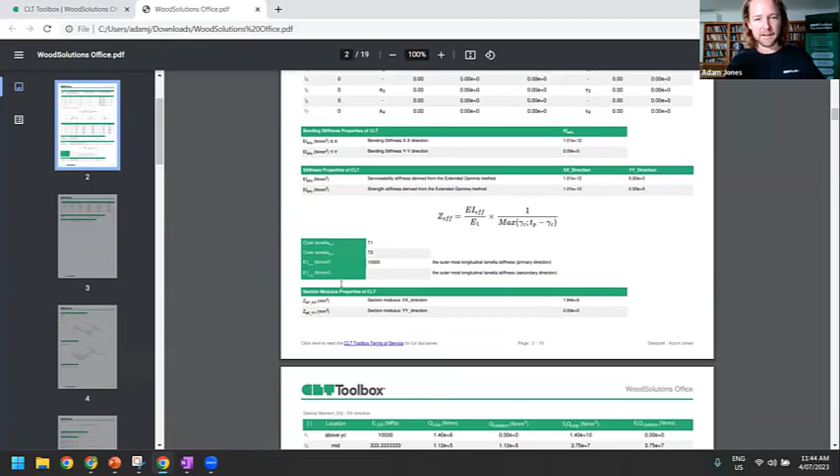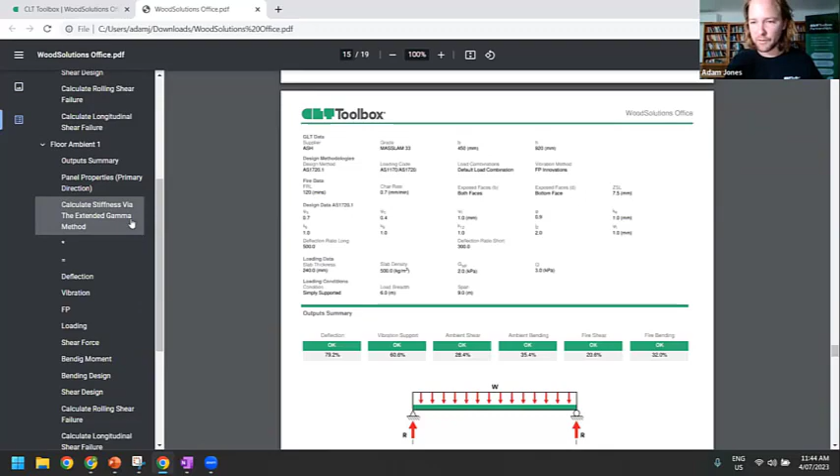So yeah, you can print all your reports here. You can scroll, toggle the order of everything, do your calculations, get your design report, and these are the things that take a long time to build. I just did 3 reports, and it's 19 pages here. Obviously when you do a big building there's a lot more going on, but it's a way of us having a confident solution to take the industry forward with proven design methods, using that concept of leverage as much as we can. So that's the design report.

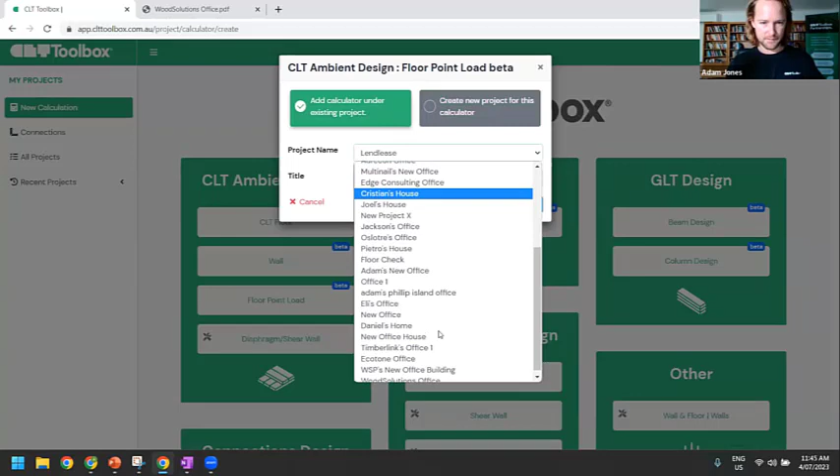So moving back, I'll go back to this view here. We've got the point load. This is our most recent calculator, and you've got all the different examples I've done there. I'll just do a new office project for one ambient design.

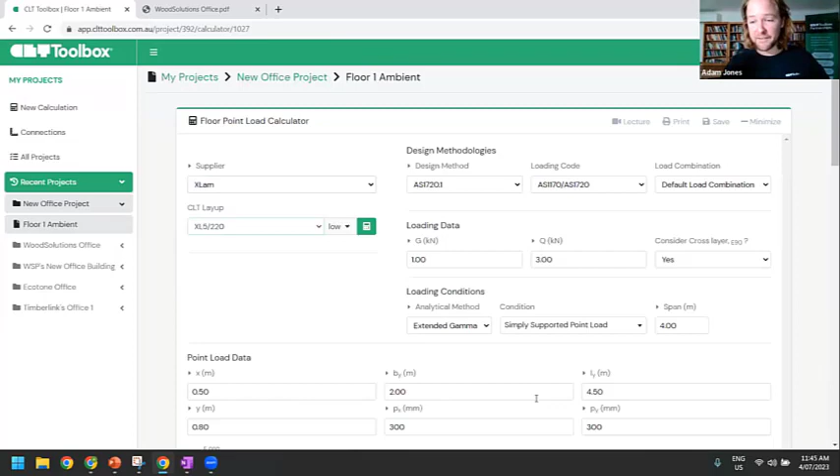And something like a point load, it happens. It's a question I got all the time when I was at XLAM, and the way to solve the problem was I'd send people the guide to the individual engineers, and they'd have to read it and figure it out and then build spreadsheets to solve the design, which is a big ask. So instead, we've made it—we've solved the point loads once.

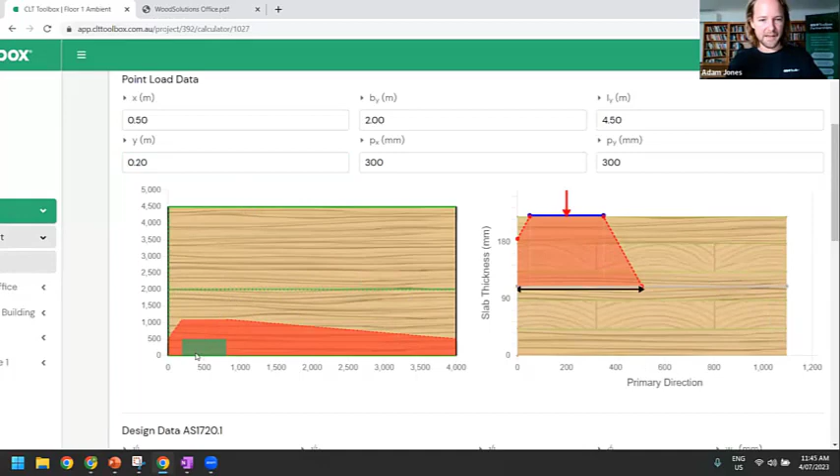Something like this is quite complex, even though it looks simple. We made it to look simple, but as you move it closer to the edge, the slab edge here, you've got a different BV, your effective width for the shear, for your shear capacity checks and so forth. So we do all those calculations.

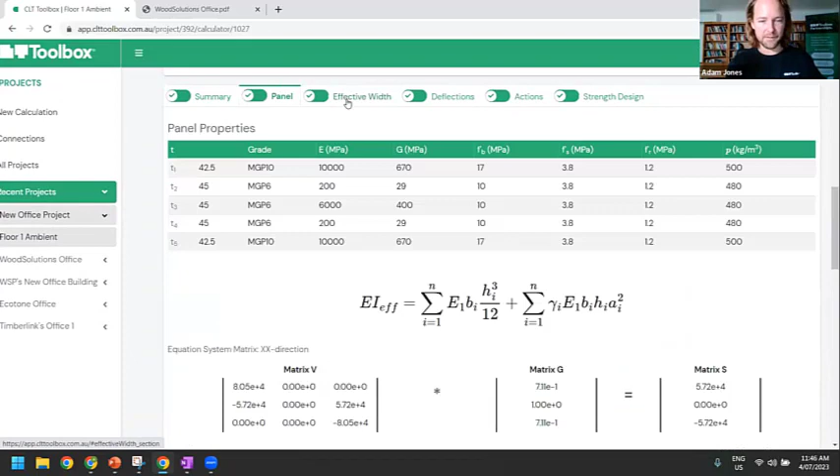We have all the different design methods, so again, a section modulus from before, ability to educate the users on it. So as opposed to sending a PDF guide, you actually have the education as if you would have a PDF guide. But not just that, you've actually got it linked into the supply chain as well, and able to use it straight away, and get across your problem.

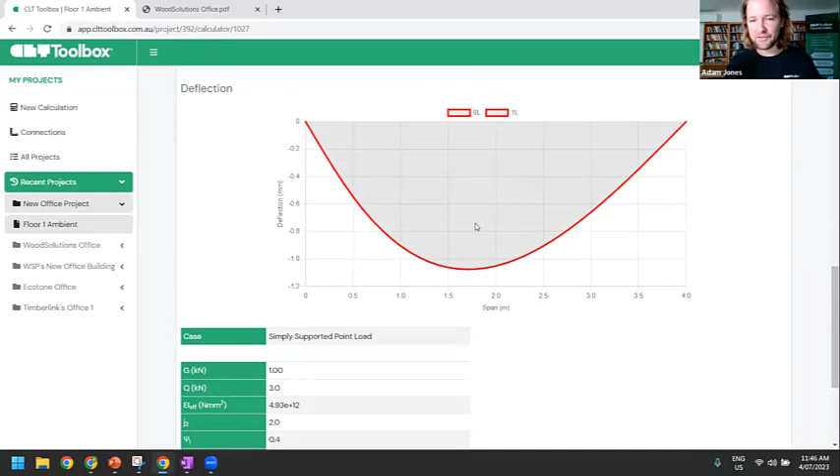Things like deflected shapes—had to go back to the double integration method from uni with the team to solve that one. Action, shear force, and bending moment. And again, education, not being a black box every step of the way. So yeah, that's where we are now.

As I said, we're just starting our journey. Our team's really building up now. We've got the office, and we're going to have 15 structural engineers by the end of the year, and looking to partner with the supply chain as much as possible, with a general belief that if we just make things as easy as possible, then we can solve one of these bottlenecks and drive the demand. Because we're not supply constrained, as some might say—we've actually got supply chain ramping up and some capacity there. So we're demand constrained currently, and there's plenty of room for more timber buildings around Australia and New Zealand.